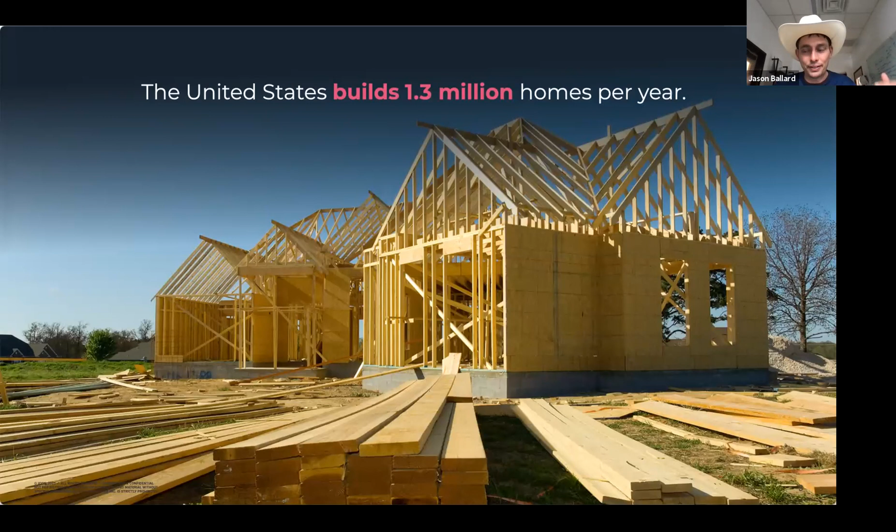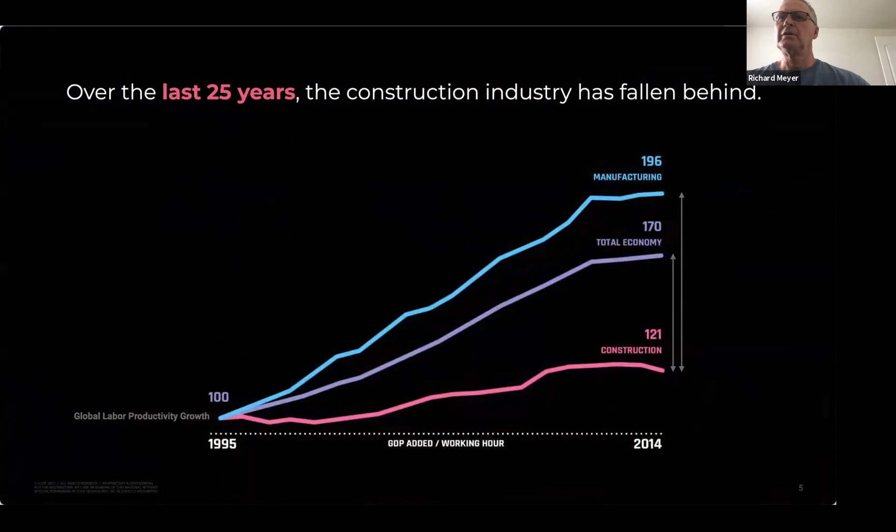So ICON was originally provoked into existence—I say provoked intentionally—by the global housing crisis. In the United States alone, we need about 3.3 million homes per year, and we're only building about 1.3 million. So we're going about 2 million homes into the hole every year, year after year. This is leading to price increases, quality decreases, and all kinds of sustainability and resiliency issues. It's a really big problem because human shelter is a basic need, like Maslow's hierarchy of needs, right there with food and water. The building industry is the number one contributor to almost every environmental issue we can measure. And from a macroeconomic perspective, the entire industry, which is the largest in the world, is going backwards in terms of productivity, which is not what we want at all for an advanced civilization.

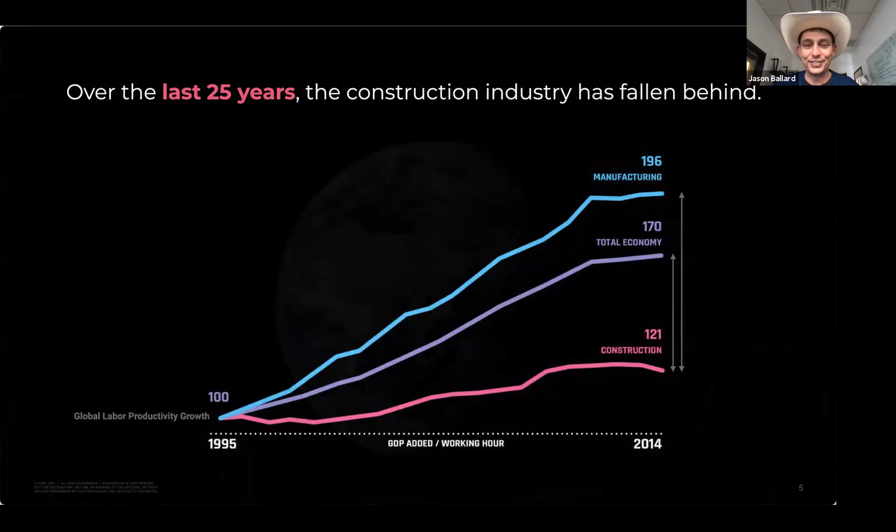If you expand the scope broader, outside of the United States, about 1 in 7 of our sisters and brothers in the world do not live in housing we would consider adequate. Another way to say that is, if it was someone you knew and loved, you would not accept it. So this is a crisis, the global housing crisis—that's what everyone calls it. And it's related to the fact that we've been building houses and structures the same way for about 1,000 years. That is not CEO hyperbole—you could Google a 1,000-year-old home and find that it's made of lumber and bricks or stone and mortar. And that's exactly how we build to this very day.

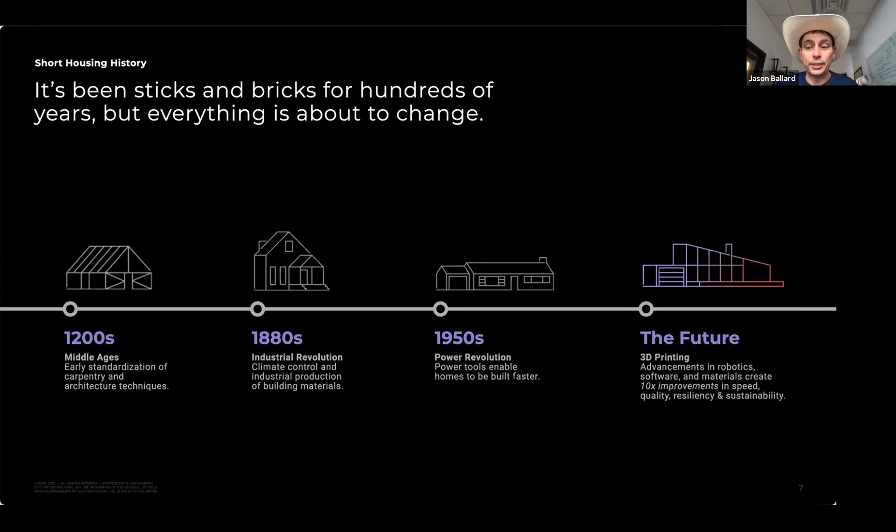And it kind of got us out of the caves and temporary shelters, I suppose. But we've now reached the limits of what this approach to shelter can do. And we believe at Icon that it's time for the construction industry to join the digital robotic age.

We're a construction technologies company. That's exactly what we do. We work very deeply in robotics, in developing our own software to control those robotics and the larger construction process, and in the advanced materials necessary to make all of that happen. So we don't outsource any of that. We have very deep subject matter expertise in all of those areas, with PhD level, multiple PhD level employees.

I think we actually have 12 ex-CEOs that work at Icon. Another way to say that is, I'm not even close to the most impressive person who works at Icon. I'm just the most excited. And so that's why they let me do these presentations.

But the big point about Icon culturally is we really are trying to develop these technologies and use them to serve the world around us. We are a company in service to the world. The primary form of that service has been in housing.

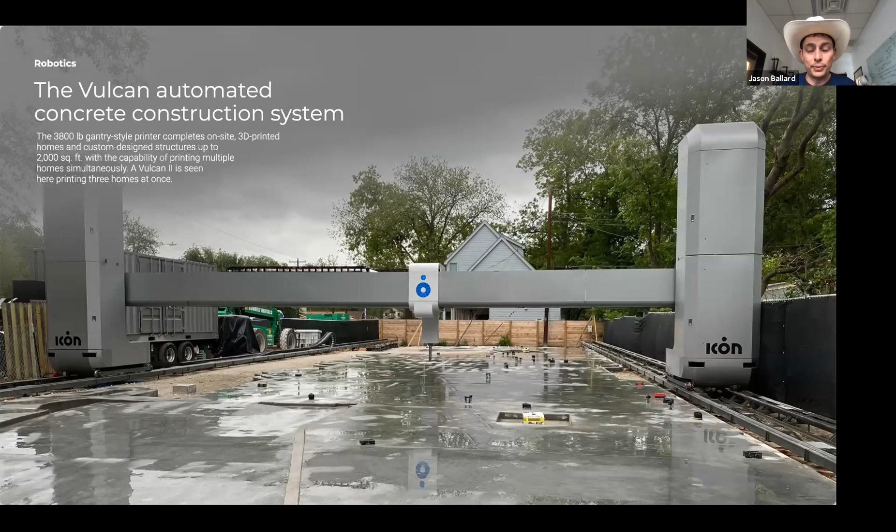Here you can see an example of what it looks like for our Vulcan construction system to be deployed out on a home site. This is a house I'll show you more about in a minute, that we printed in East Austin. We can print houses about 40 feet wide and 12 feet tall. The way that we got to those measurements was working with our development partners. This printer will print over 90% of single-story homes in the world.

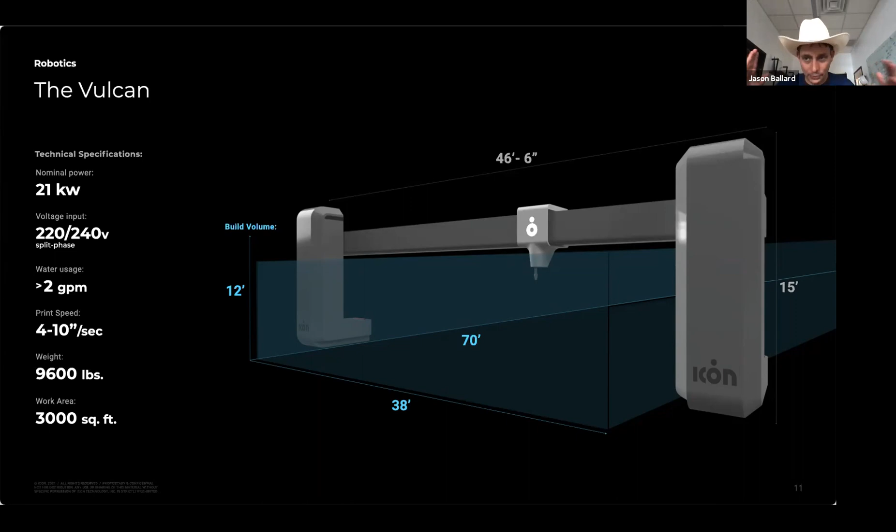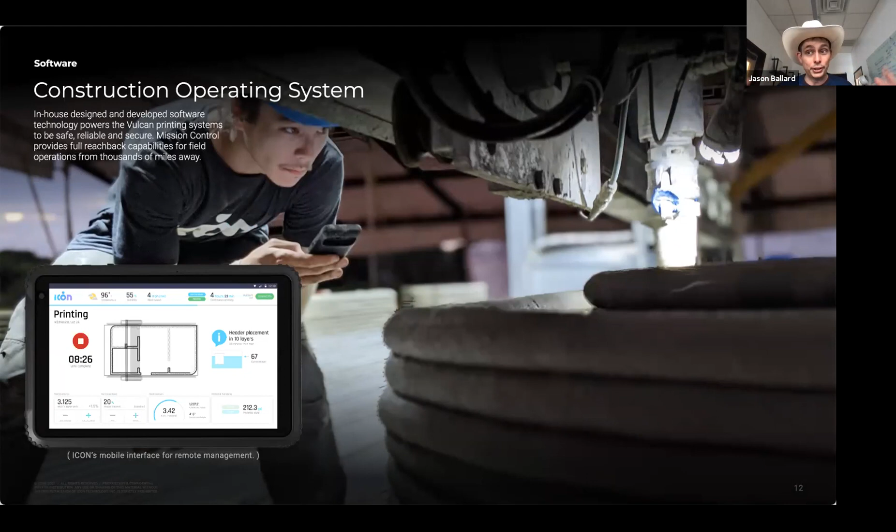So this is sort of where we started, like single-story housing. We've developed our own construction operating system, so all of these robotics are operated with a phone or a tablet. We actually have a mission control where we can remote operate and control the printers from a long way away. This will be very important in our work with NASA in the future.

The material science that we use is inherently more resilient, strong, and high performing than a lot of our conventional building materials. I love wood, I think wood is very lovely, but wood also wants to catch fire. It wants to mold, it wants to be termite food, and it's a conductor of heat. So often you're working against the fundamental properties of wood with regard to what you want a building to actually do. By working with these extrudable masonry materials, you're more naturally cooperating with the behaviors of those materials.

And so the result, why we're so excited about 3D printing from a terrestrial perspective, is that it's faster. We're able right now to print a normal sized American home in about a week. There's some finish out and stuff of course, but that process of delivering the wall system takes a conventional builder 4 to 8 weeks, and we do it in a single week. That alone lowers cost, but of course automating out all those trades and using a single material supply chain also lowers cost. We do all this without compromising customizability.

A lot of the approaches to low-cost housing in the past, whether it was trailer houses, prefab houses, modular houses, or shipping container houses, really reduced design freedom. With a 3D printer, if you printed 100 homes in a row, all 100 can be different. And in fact, if you wanted a house in the shape of a Fibonacci spiral, we could print you a house in the shape of a Fibonacci spiral. It expands rather than contracts design freedom.

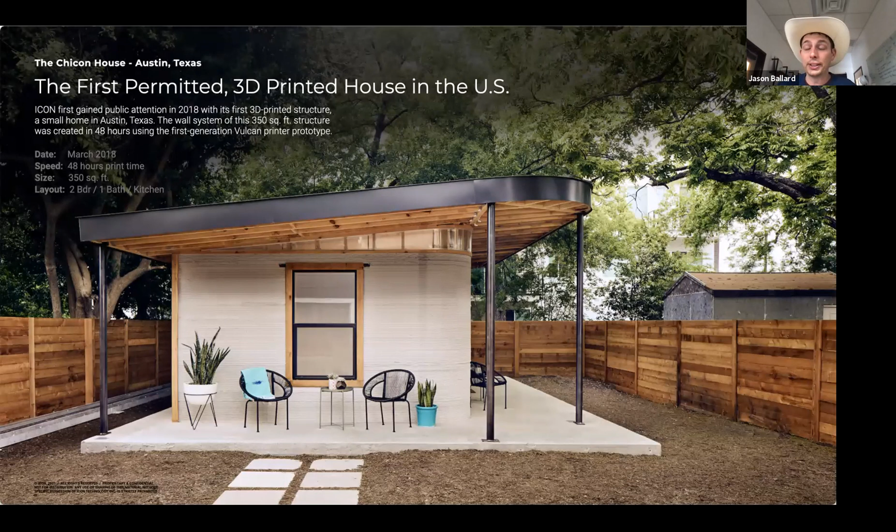We then printed a very similar house about a year later, same floor plan, twice as big, but delivered in half the time. So an overall 4x improvement in construction performance.

We then printed a series of homes for people experiencing chronic homelessness in Austin, Texas. We set up the printer and printed them three at a time, and all three have different floor plans—which is very difficult and expensive to do with conventional building methods. This project is about 2.5 years old now.

The person who lives in this particular house—his other options were a used trailer house or continuing to live under a bridge. These are homes that any of us would be quite happy to live in. My family of six would have a hard time fitting in this particular house, but in terms of their quality, comfort, beauty, and resiliency, it's unbelievable to be able to deliver this quality of construction at this price point.

We delivered the first 3D printed community down in Mexico. This project was notable because it was actually in a seismic zone, and the region received a magnitude 7.1 earthquake that caused extensive regional damage and zero damage to the 3D printed homes. It turned out the safest place to be in Nacajuca, Mexico during that earthquake was in one of our homes—and how seldom that's the story for the very poor, who are usually the last people to receive advanced technologies and building materials. So this was a project we were really, really proud of.

It was actually documented pretty well on a TV show called Home. If any of you have Apple TV, there's a show called Home, and I think the season finale was about this project. So if you want to know more about it, you can look it up there.

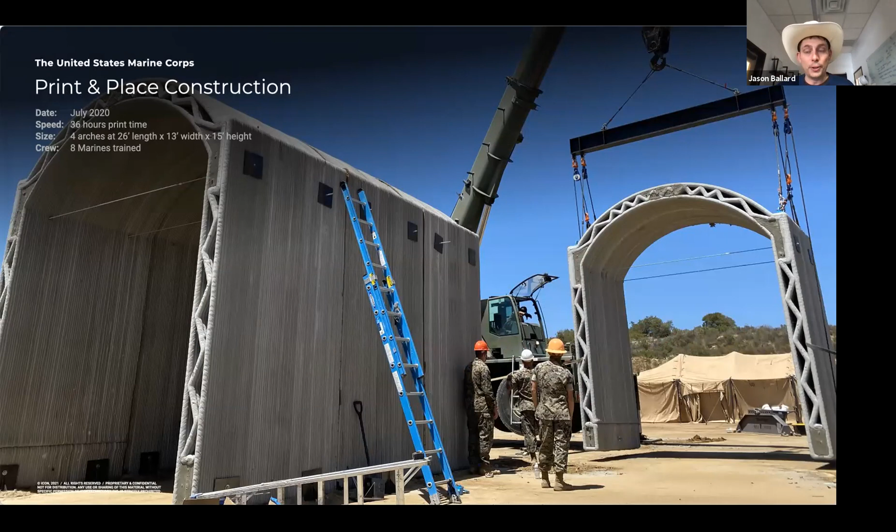We also have a large contract with the Department of Defense and multiple military departments. As you can imagine, they're highly interested in the rapid deployment of resilient infrastructure. Typically, their choices are either fast but unsafe and temporary shelters like tents and prefab boxes, or more resilient permanent bases and buildings that take literally an act of Congress and years to get on the ground.

This particular project, we showed up to a remote part of Camp Pendleton in California, and they didn't tell us what they wanted us to build until after we showed up—that was kind of part of the drill. They said, we want a vehicle hide that a missile launcher can park under to be safe, you have two weeks to build it, go. We printed it in three days, and then the team went swimming in the ocean. So there you are, kind of going inside.

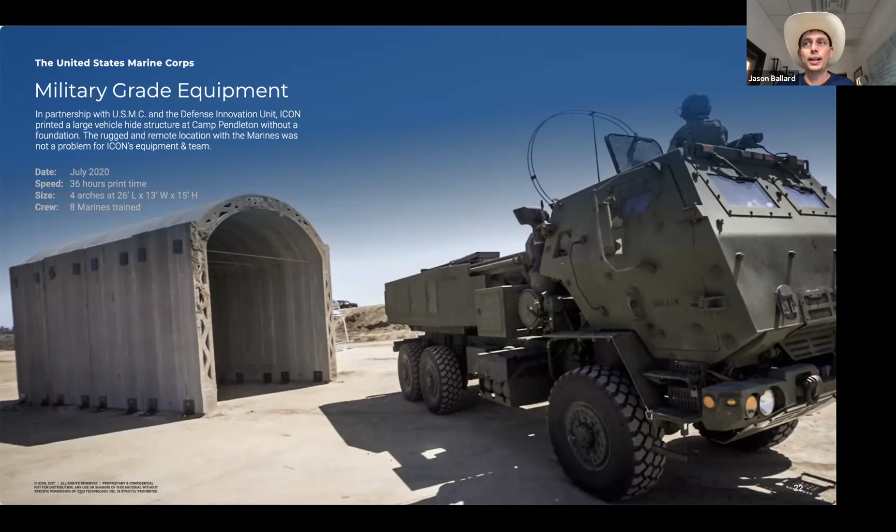So that relationship is progressing really, really nicely. It was through a funding vehicle created by the Air Force, AFWERX, their innovation command, that we first received our first NASA funding—I'll talk about that in a minute. Continuing to work with the military, we're now doing a lot of work replacing aging domestic military infrastructure.

We have lots of barracks all over the United States and other military buildings that are very obsolete, aging and decrepit, and certainly not worthy of the sacrifice that the women and men in uniform are making on behalf of this country.

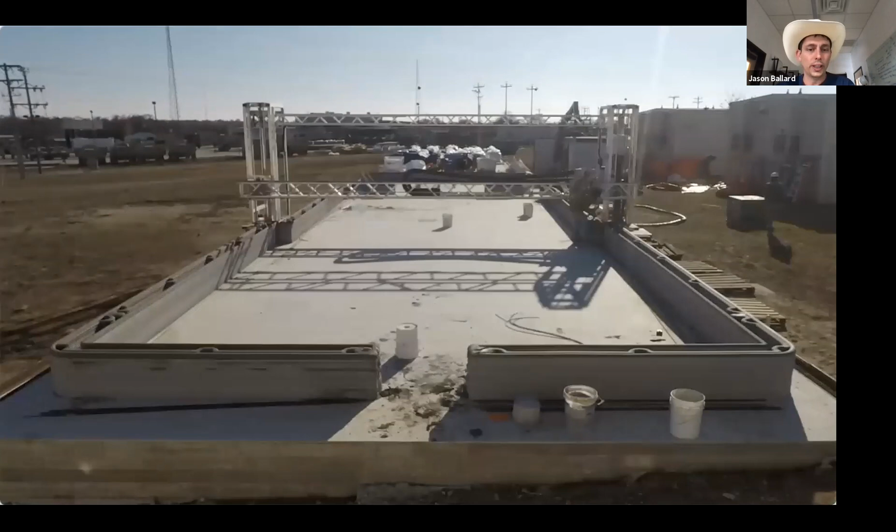So the first barracks that we did in the past year is the largest 3D printed building in the Western Hemisphere, it turns out. But now we're going to be doing a series of these. I won't watch the whole video, but some of you may have been wondering what it looks like when you 3D print, so here's a little bit of a video. It'll show one wing of that barracks going up.

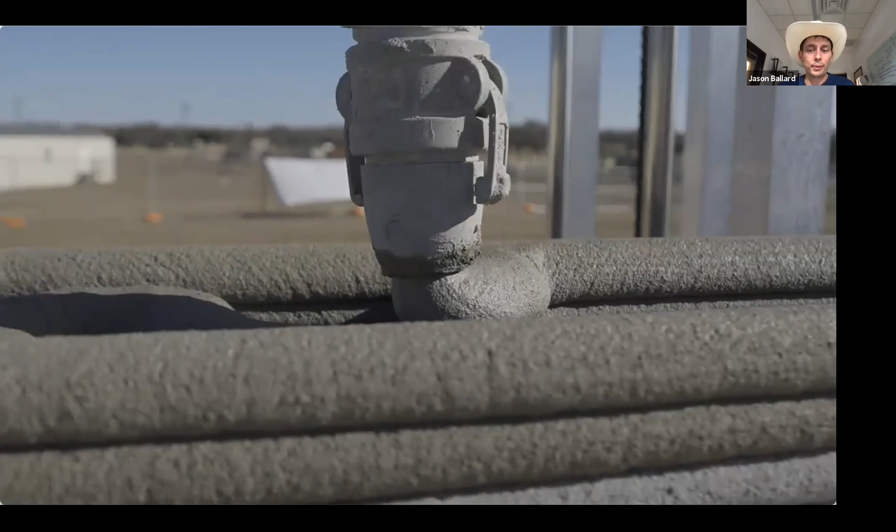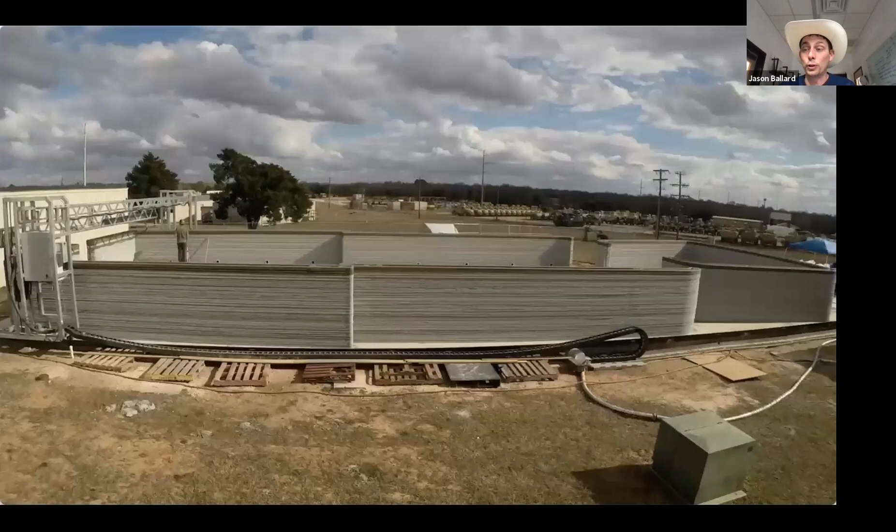It's being printed in this particular video by a printer that's about 2 generations old. You can get a sense of how layer by layer it follows the floor plan. On this project, it was in a bunch of wild weather. Any of y'all remember the snowpocalypse, the big snowstorm that hit Texas last year? When we started this project it was in the 80s, and then that snowpocalypse happened in the middle of it. So our printer has printed as cold as 36 degrees and as warm as 105 down in Mexico. The environmental range is quite large.

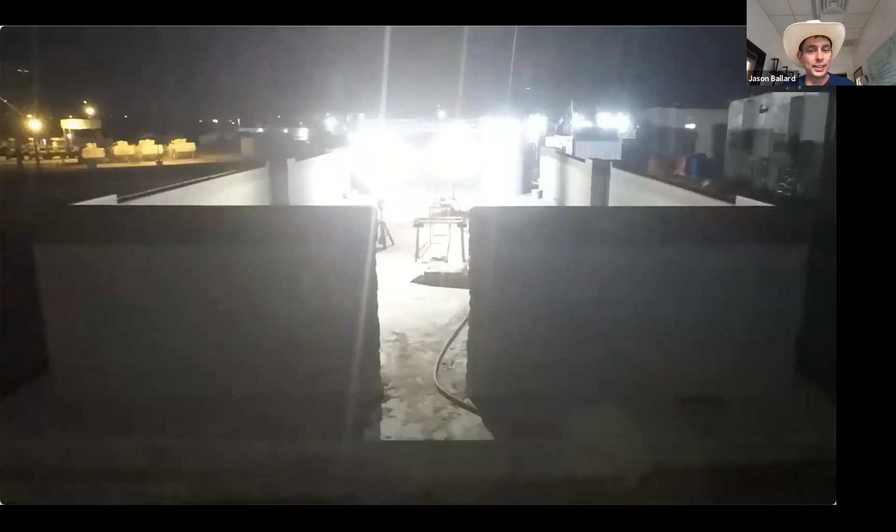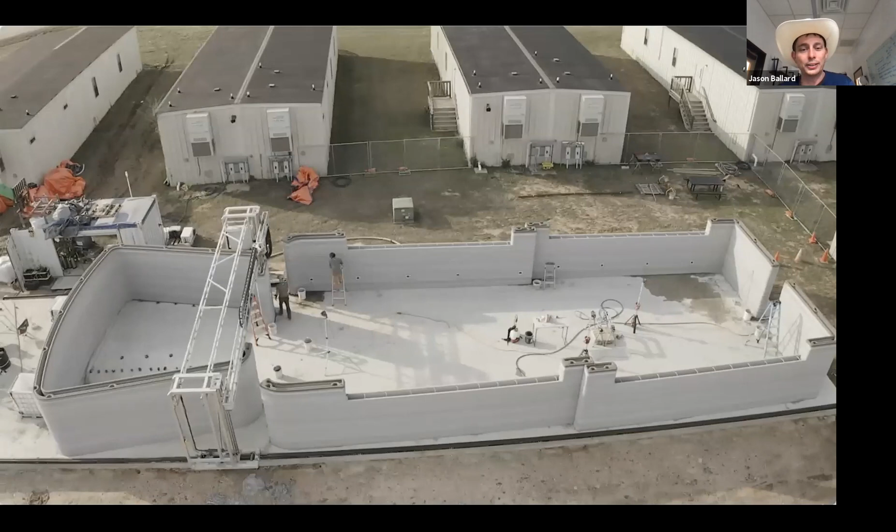You can also notice how few people are in these photos. It's mostly just engineers and staff monitoring what's going on. We're really proud of this project. The DoD—you can see some of the old aging barracks in the background there that we're replacing.

We're very, very pleased. Most recently, the most recent project we finished that was announced was our first market rate housing in the United States, the first 3D printed market rate housing in the US. It was an infill development in East Austin. These homes were sold at market rate, and people can get mortgages for 3D printed houses. This represents a load of progress from us, and the quality of the prints. This was just a really big moment for us, and we're super proud of it.

Almost through with the Earth stuff, so we can get to the fun space stuff. We're in the process of finishing up a house we call House Zero, and this is a house we're using to really advance architectural possibilities. For a long time, the customers who have hired us have ended up asking us to print houses that look a lot like the houses they're used to. We've always thought this was a shame, because 3D printing opens up all these fantastic new possibilities for shapes and architecture, since a curved organic form is the same price and difficulty as a straight line.

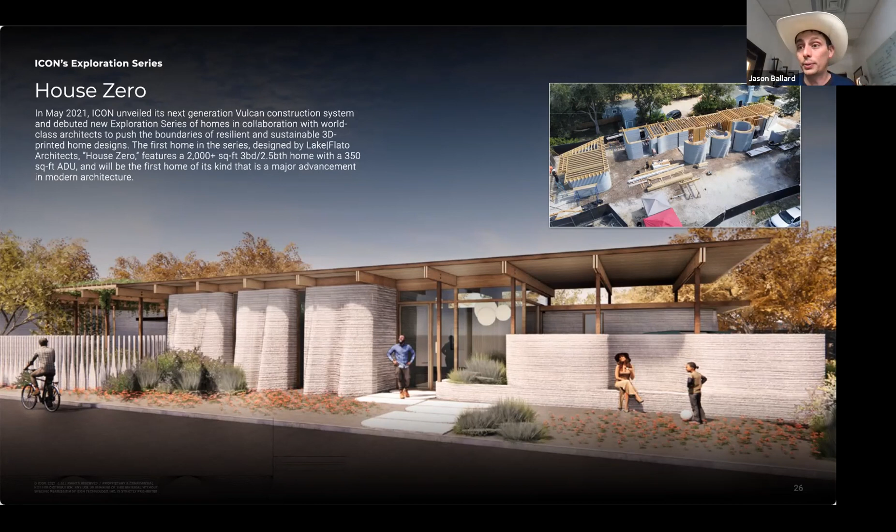So you can see we've really incorporated organic forms. These look like very premium high-end finishes and approaches to building, but they're very straightforward and simple for the printer. In fact, those ripples in the wall actually make those walls stronger—much like if you had a flat piece of paper it would fall over, but if you fold it, the paper will stand up. We can use the shapes of the walls to make them stronger and more beautiful at the same time. Very, very cool stuff.

Most recently, you may have seen in the news in the last week, we just announced that we're about to do a 100 home community in the Austin, Texas area, where we're going to deploy a fleet of printers. We're doing this in partnership with Lennar, the largest home builder in America, and we're very excited about this project. But as I said, we're trying to put this technology in service to humanity, and part of that is solving big problems, but another thing is opening up profound opportunities.

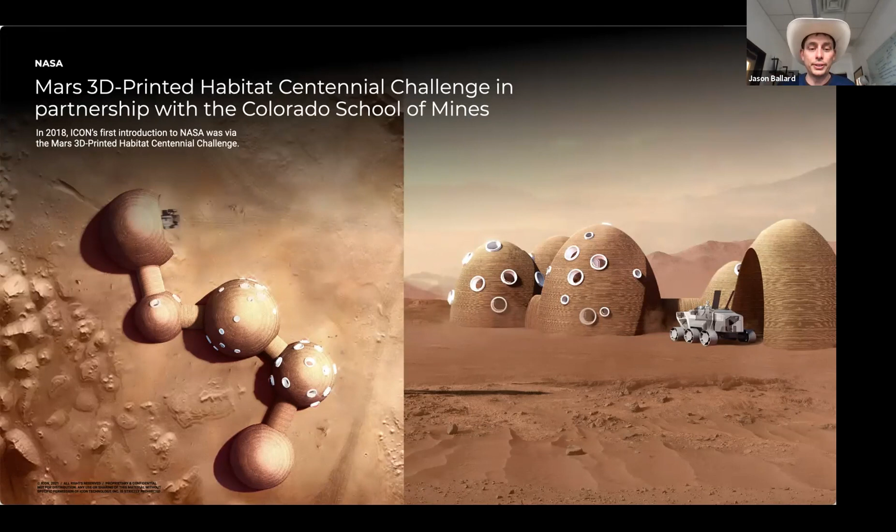So we have been working with NASA since the very year this company was founded. That year, NASA had a Mars 3D printed habitat centennial challenge going on. We partnered with the school where I'm doing my graduate studies, the Colorado School of Mines, and we participated in that contest, and we were an award winner and a finalist. That opened the door for us to begin developing this technology for space much more aggressively. More recently, the conclusion of that Mars journey was at the Johnson Space Center in Houston, and I know Stokes is familiar with this, and maybe some of you are as well.

They wanted to build a Mars analog habitat that really resembled the kind of permanent infrastructure we might deliver on Mars, and they believe it'll have to be delivered with robots using local materials. So they commissioned us to design and deliver a Mars analog habitat that they're going to use to study long-term human health and performance, while astronaut analogs live there for a year at a time, with an 8-minute communication delay, the whole 9 yards, to begin researching the effects on human beings for long duration space exploration.

This is very cool for us. I mean, it's like we really can build an off-world construction project using off-Earth analog materials, and we can do it robotically. So we're very, very proud of this project. I hope you all get to see it.

Being inside of it has the feeling of an advanced but extinct civilization that left a temple here. It's very cool to be inside. We're done with the print now, so we're doing all the mill work and finishing out the thing soon.

They're going to start missions in it next year. It's also very cool as a space nerd that a lot of the pictures of human beings getting ready to go to Mars will take place inside an iconic building. For a skinny kid from East Texas, it's definitely a pinch-me moment. And it was cool to be able to do it in Houston, which is very near where I grew up. So very cool.

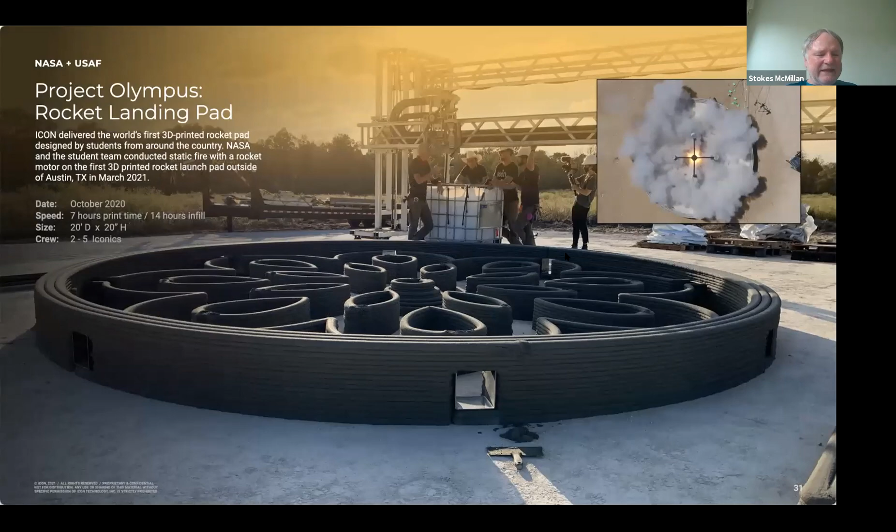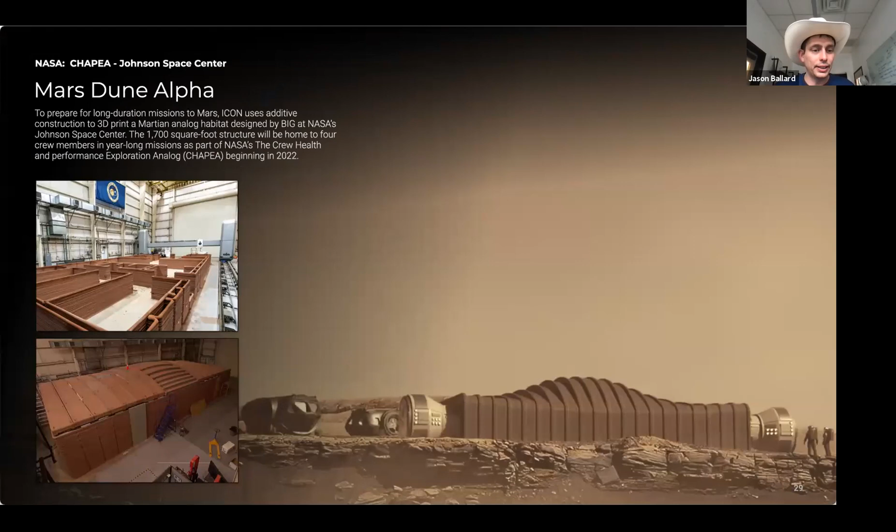Okay, we got it. The most long-term of our engagements with NASA is something we call Project Olympus. And that is our attempt not to use our Earth-based printer, which you saw on this one. If you see the left inset printer there, we're using our normal Earth-based printer.

But our most long-term engagement is on Project Olympus. This is the desire to dedicate effort to developing a purpose-designed off-world construction system. It has to fit in the payload of a rocket, it has to conform to certain mass and power requirements, and it has to use the local materials of the moon and ultimately Mars to do its work. So this is the project that we call Project Olympus.

We're contracted with the Marshall Space Flight Center to do this work. The NASA Center for Advanced Manufacturing and Construction is at Marshall, and they're taking the lead on these off-world construction technology developments.

As part of that program, we've already demonstrated a 3D printed rocket pad. They believe rocket pads will be some of the most important early pieces of infrastructure needed if we're going to go to the moon to stay. If you return over and over to the same spot, you're going to blast a crater in the surface of the moon. Not only that, the mass of modern landers requires so much thrust during landing that the ejecta from the lunar regolith can actually reach orbital velocities. It could really make a big mess if we can't contain the dust and the effects of repeated landings in the same spot.

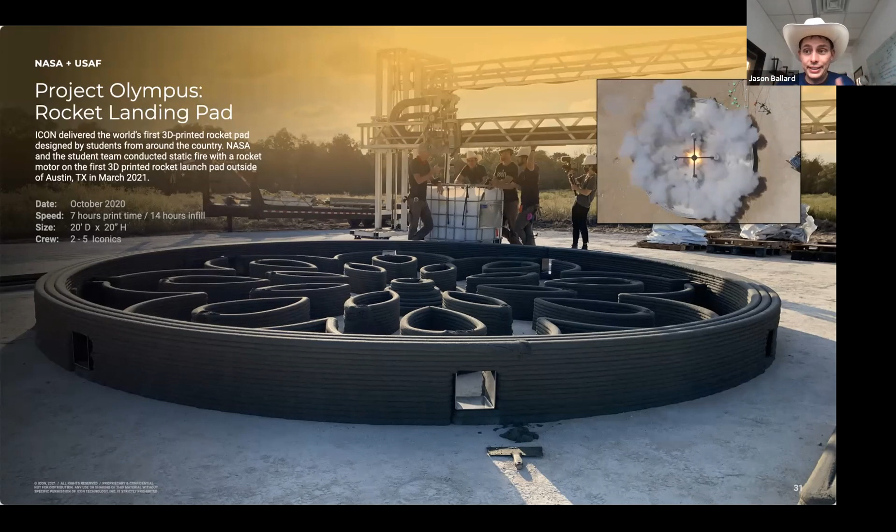So we created this 3D printed rocket pad with a cool internal structure meant to defray the exhaust and ejecta. We actually strapped an M-class rocket motor to it to see how it would fail. I hate to spoil the ending, but the rocket pad did not fail. We had a lot of sensors and were able to grab a lot of data, and I believe there'll be a scientific paper coming out about these results in the not too distant future.

But we've now at least confirmed in an Earth analog environment that we can 3D print a rocket pad, a landing and launch pad, that could withstand the kind of thrust you would expect of a lunar lander and launch vehicle.

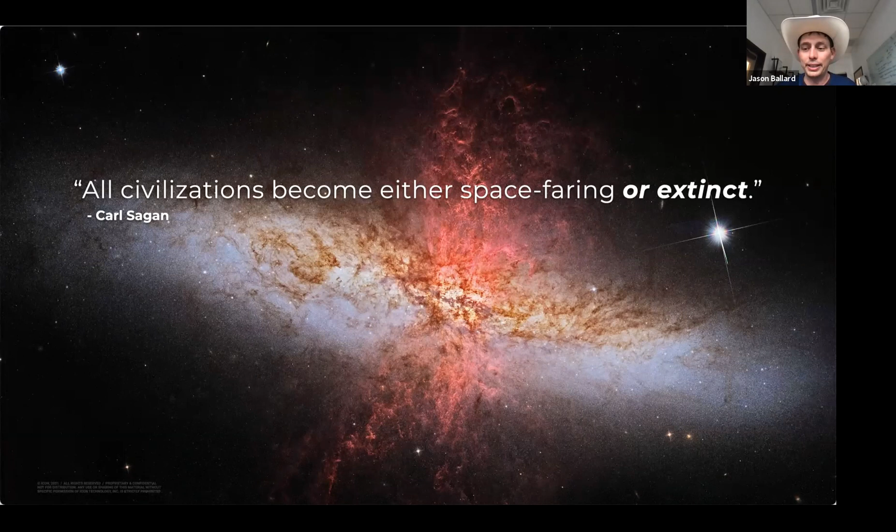So that was very cool for us. And all of this makes us feel like there really is something for us to do here, and not only that it's cool to do, but it's important to do. I truly am part of that camp of people that believe becoming a spacefaring civilization is the most pro-human, optimistic, pro-future thing that you can do. It's a thing that we need to do, not a nice to have, but it is a long endeavor.

So we're going back to the moon to stay, as part of the Artemis program. That's the program now, and so that's what we're building for. But we feel this great responsibility, because what we're talking about is humanity's first, not our first camping trip, but our first true home on another world. And I kind of can't believe I get to work on this. It's really not only scientifically and engineering-wise interesting, it's a very romantic idea. It's like the coolest project you could ever hope to work on.

It's a big trick, right? The moon is not slightly different. The moon is a lot different. In fact, there's a lot of ways in which Mars would be easier. Mars has an atmosphere. Mars has more gravity.

On the moon, we're dealing with micrometeorites that rain down at about 180 per square kilometer every year. They have no atmosphere to burn up in. They all come down, and they're at ballistic velocities.

The lunar dust, I don't know how familiar you all are with it. It's brutal. The Apollo astronauts said it was the worst and hardest challenge of the entire Apollo program, was managing the lunar dust. 100% of seals during the Apollo program failed. Everything from the seals on the astronaut gloves to the seals on the doors. These were seals that had been tested for thousands of hours on Earth, and they failed after 13 or 14 uses on the moon because of the dust and its abrasiveness. There's no weathering on the moon surface, so it's like micro razor blades. And on top of that, the dust can get electrostatically charged and levitate and float. The moon dust is crazy.

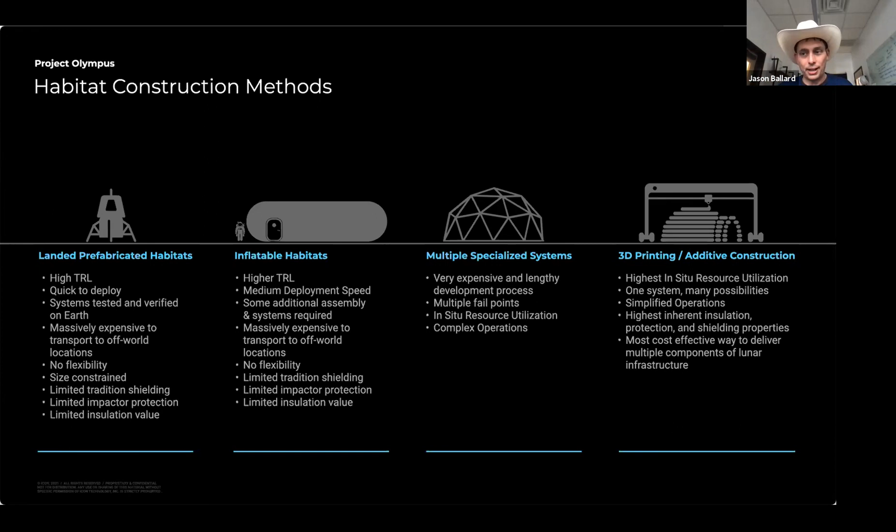I don't think this is just a neat thing to have. I think we have to have it if we're going to become a spacefaring civilization. We have to be doing robotic construction using local materials, full stop. I don't think there's another way to do it in the long term.

To give you a sense of what I mean by these costs, we ran the numbers.

I think we got another hot mic. Who's that? What's his name? I don't know what it is. Hey, we got a hot mic. Dave Hansen, please mute your mic. Oh, sorry about that. No worries.

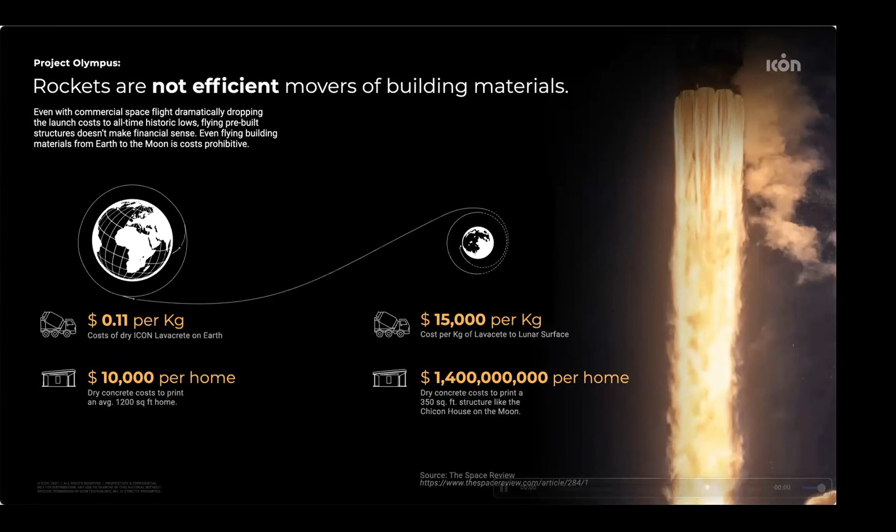We actually ran the numbers on if we'd taken the dry material of that first little tiny house we built up to the lunar surface, how much would it cost just in rocket fuel to deliver it, not build anything. The result is about $1.4 billion to deliver materials sufficient for a 350 square foot structure to the surface of the moon. I know real estate in San Francisco is expensive, but this puts it to shame. We're never going to have a moon base this way if it costs $1.4 billion every time we want to build a tiny house.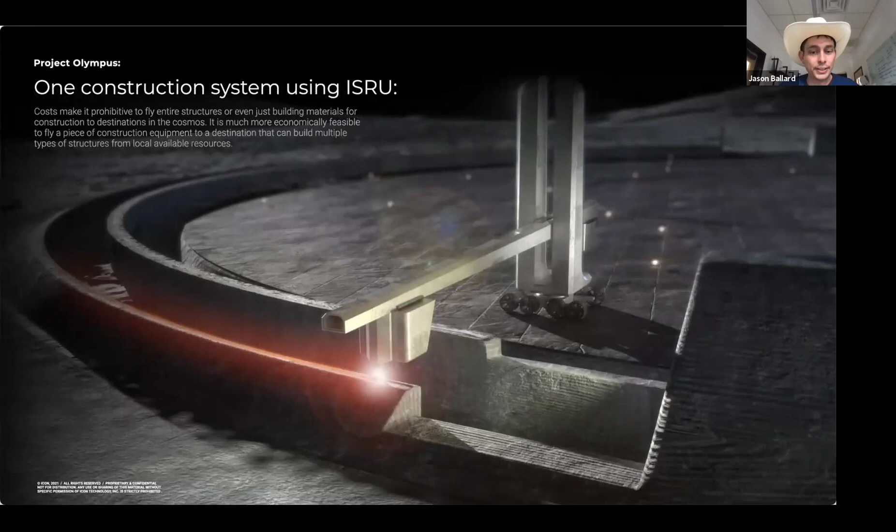The phasing from here for us is we're scheduled presently to go to the moon in late 2026 to demonstrate the core subsystems, and I'll show you some of those subsystems soon. That will open up full-scale demonstration in phase 2, and then hopefully the moon base gets underway in a very permanent way. The rendering in the background is a moon base design we spent a lot of time on, situated on the edge of a permanently shadowed region of the moon where we believe there's water and other volatiles present.

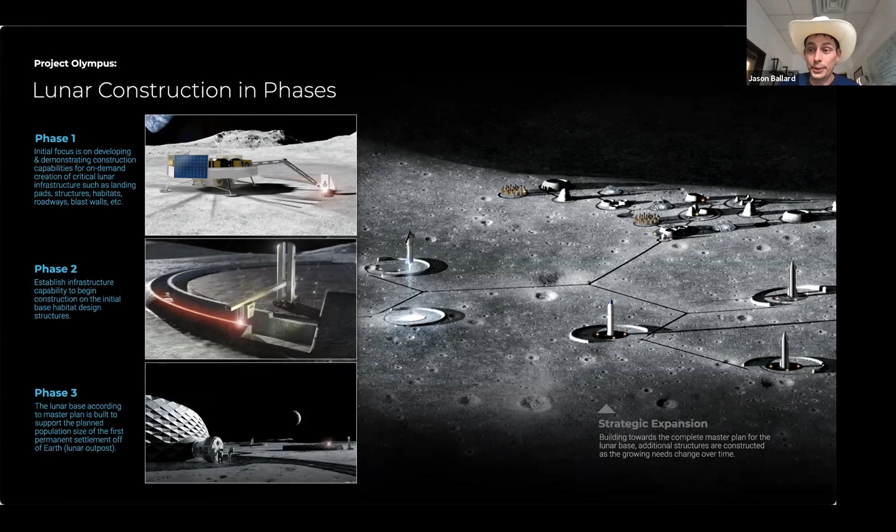So that's probably where you'd want to situate a moon base. We've used a Steiner tree architecture for the road layout to minimize the amount of material needed to build those roads. Everything you see in that picture in the background is buildable within the dimensions of the Olympus system. This is as close to real as it gets. We've run all the thermal calculations on those buildings, we've run the stress calculations on those buildings. I'm not saying this is what NASA will build, I'm saying what you see could be built. Nothing in that picture is science fiction.

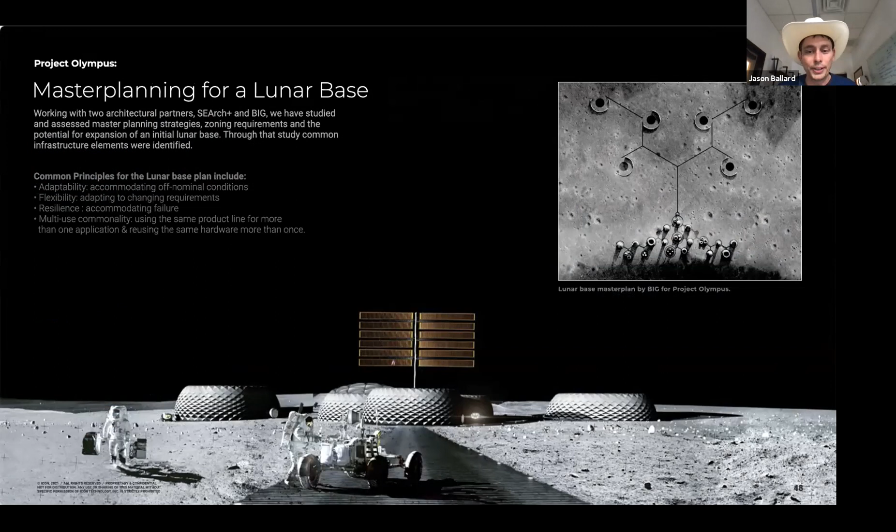And so we're excited about what all that could mean. I want to talk a little bit more about the actual processes we're using to take raw lunar regolith, the local soil, and turn it into a building material. That's most of our work right now.

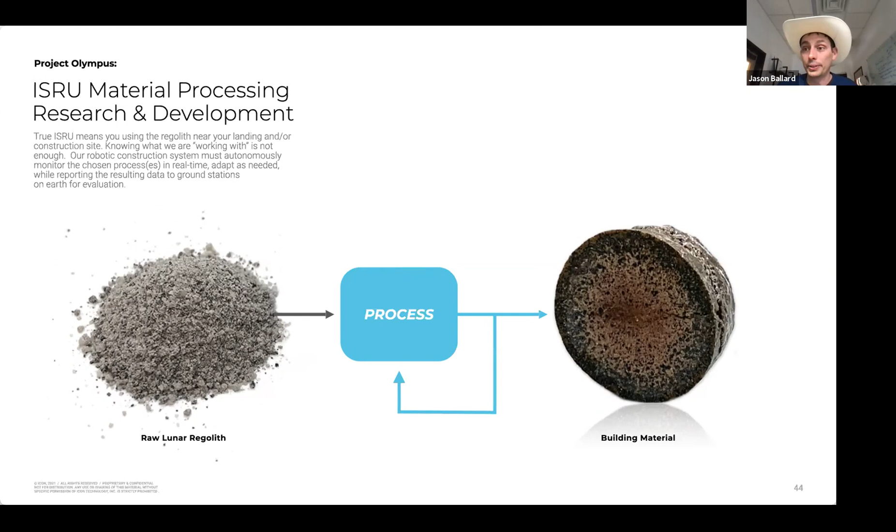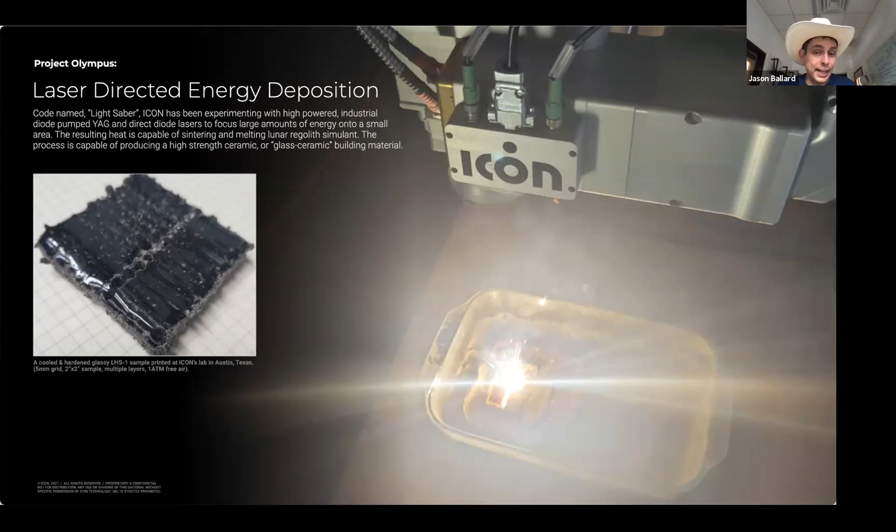Our two favorites—I'll start with my favorite—is laser directed energy deposition, where you use a laser to melt the lunar soil and turn it directly into a building material. That's the laser we've developed in-house. We're now putting it through dirty vacuum chamber testing, and we've been loving the results.

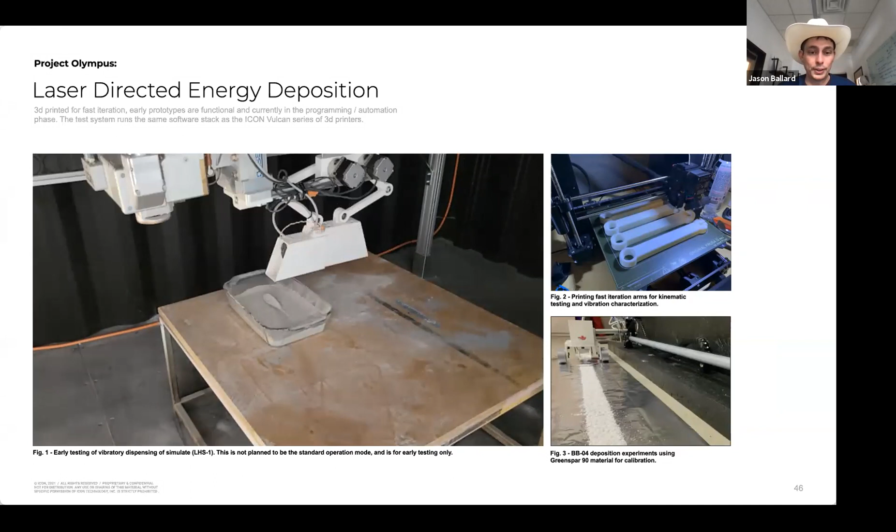This is a benchtop test. You can see where you'd deposit the regolith and then sinter or melt it into place, and the result is a building structure. We've been doing this at a small scale, as you see there, and we've slowly been turning the scale up, up, up, and up.

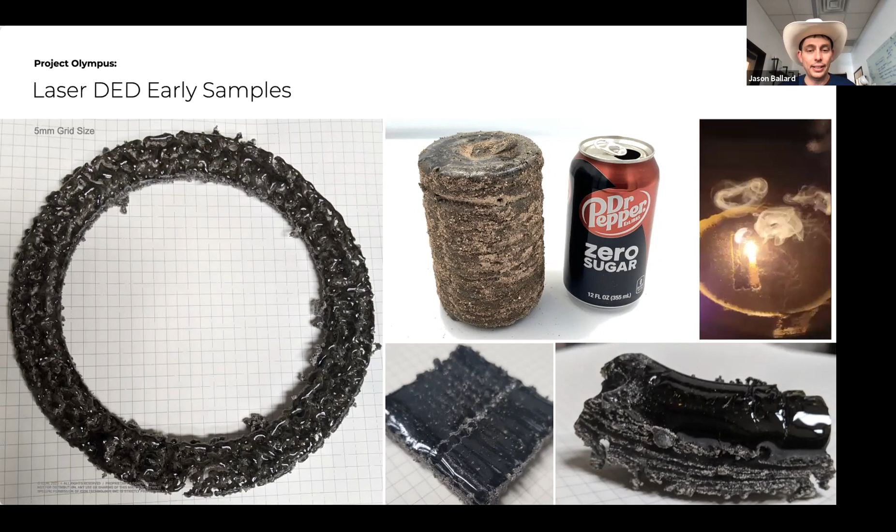We're very pleased with the results, both in terms of strength and power requirements. That little ring you see on the left, we produced with 80 watts of energy in a laser. So we can do these with the kinds of powers we'll expect to have, and I'm very optimistic.

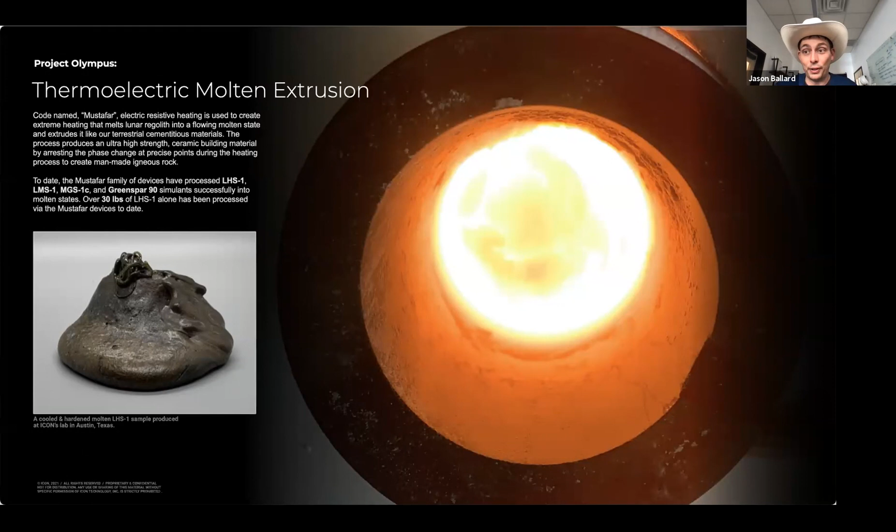The other big area of research for us is straight-up melting the lunar regolith. If all else fails, almost every material in the universe will melt. So are there highly efficient furnaces, for lack of a better word, that we could use to melt the lunar regolith and extrude it, almost like melting plastic in desktop 3D printers. This research isn't quite as advanced as the laser research, but we're liking the early results.

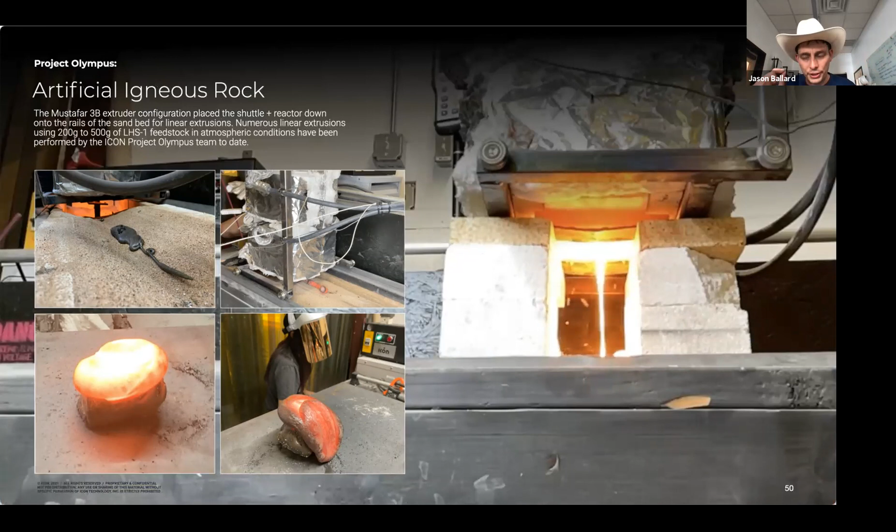It'd be nice if we had two different choices for different applications. The laser is much more precise, and the melting might be more useful for bulk building projects like walls or blast shields, where precision wasn't as important as just delivering bulk material into a built object.

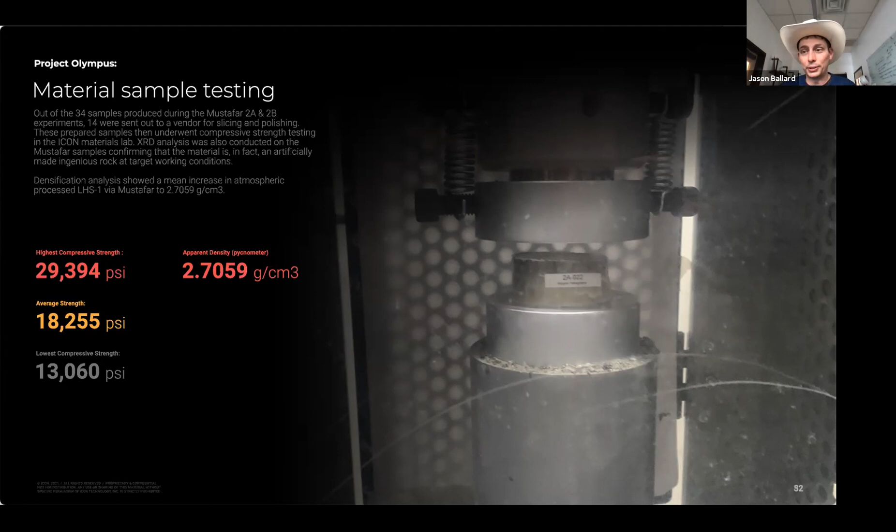We've been quantifying all our samples, and they are incredible—both with the laser and with outright melting, we're getting incredibly strong samples. As high as almost 30,000 PSI, averaging close to 20,000 PSI. The weakest we've tested was about 13,000 PSI. To put that in perspective, the concrete the Air Force requires for a runway to land a military jet is 4,000 PSI. So we're talking unbelievably strong masonry ceramic material.

All signs point to this being a very promising direction. There you see a rendering of the test we're scheduled to do in 2026, where we will put the laser subsystem and possibly the melting subsystem on a CLPS lander and demonstrate built construction specimens on the lunar surface, then hopefully take that subsystem all the way up to TRL 9, which will unlock development of the full system.

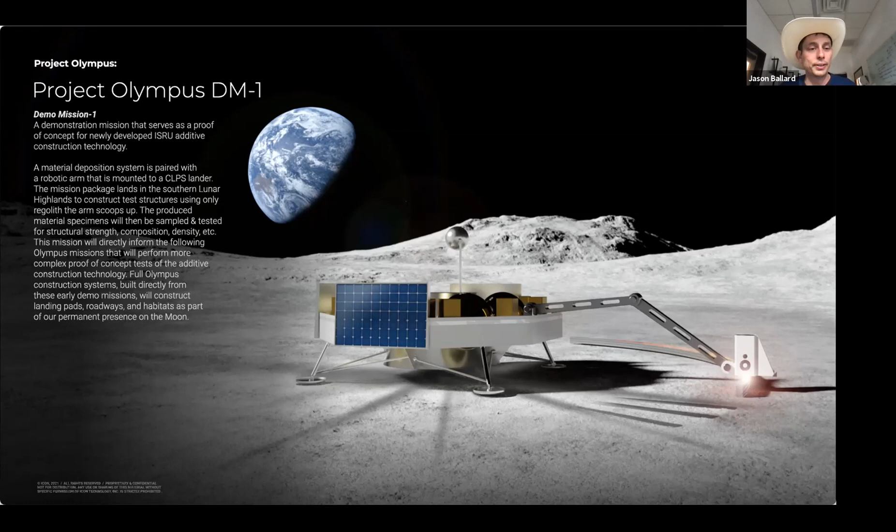So that's what we're up to. We've got a ton of amazing partners—not just NASA, but the Air Force, the Department of Defense, the Marines—a bunch of really wonderful investors who have been incredibly supportive, and some of the best architects and builders in the world.

You won't meet a more optimistic person than me that we can have a moon base if we want one. We can afford a moon base if we want one. And I hope that's exactly what happens. So that's the end of my formal presentation. I'm happy to take questions and see what's on your mind and where we go from here.

So my question is, what about insulation for domestic houses? How thermally insulating is your material, or do you have to put insulation between layers?

Yeah, so a few things to say. The bulk regolith has very high thermal mass, so we're of course going to need some life support systems in here, akin to what you'd have on the International Space Station. The question is, how powerful do those systems need to be? Our calculations show that at about 2 meters thick of wall, which is quite thick, we can do all of the radiation shielding, micrometeorite protection, and thermal insulation we need, sufficient to keep the habitat stable and livable with current life support systems. So we need about 2 meters thick of it.

Yeah, we've got plenty of time, Jason. I think we're all... oh, amazing. Can you see my screen once again? We kind of played this game once already. Yep, we see it. Okay, I'm going to try to enter full screen and see if that works.

I won't show you all, this is a very long presentation, but just to show you the kind of work that we've been doing. We did study all of the major lunar missions, every landing site, both robotic and human.

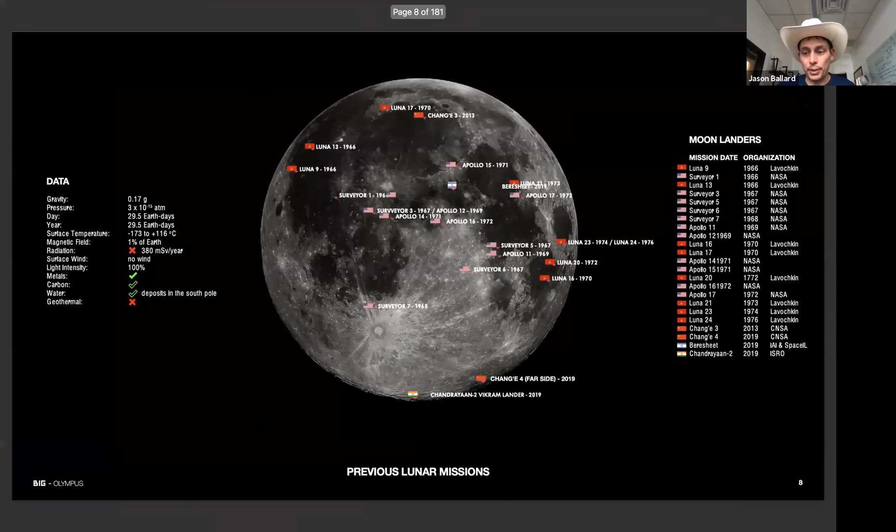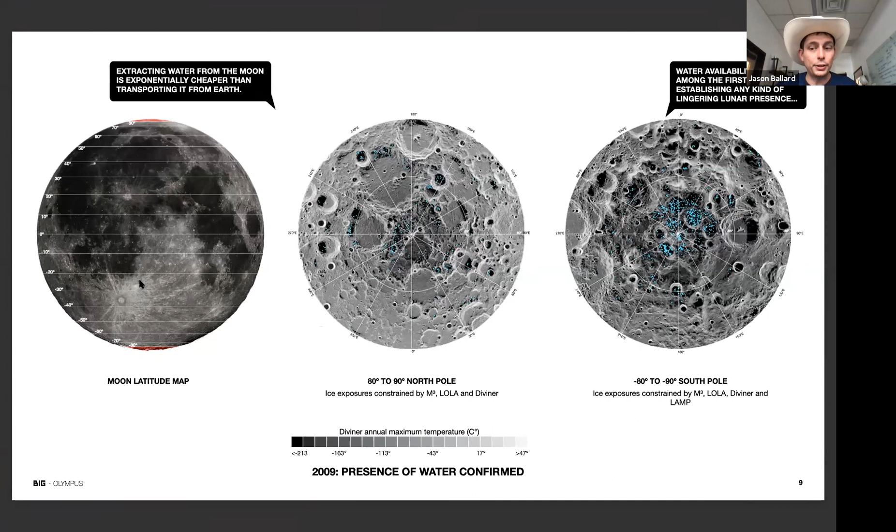We've looked very closely at where the water's confirmed, and what we know about the geology in those areas, because in the Mare regions it's very basaltic, and the polar regions tend to be very feldspar rich. So those materials would behave very differently.

So we thought a lot about everything we could find out about what the site might look like. NASA hasn't announced where the location of a moon base might actually be. We've studied a lot of other architectures, Earth-based, of extreme environments, like how humans have learned to live in other extreme environments on Earth.

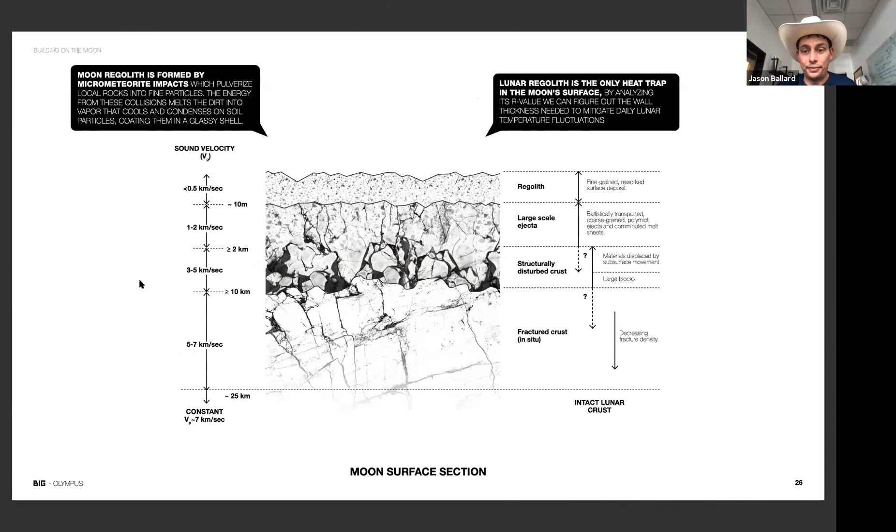We've really tried to understand, will we be able to harvest the regolith we need at a fine enough particulate to process it properly? Again, we're standing on y'all's shoulders. There's so much wonderful engineering and geological research that has been done.

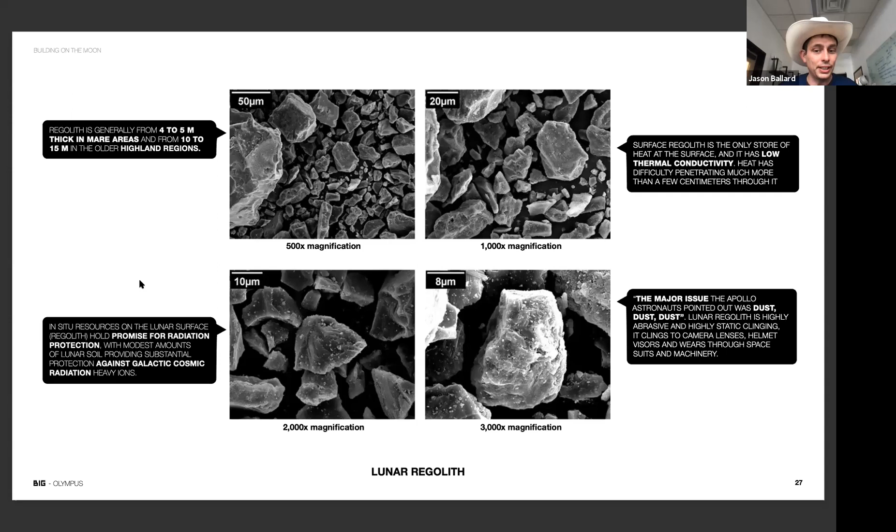This is some of the moon dust stuff I was telling you all about. It's really aggressive, nasty stuff. I showed you laser and extrudable melting today. We've also looked at microwaves and other approaches.

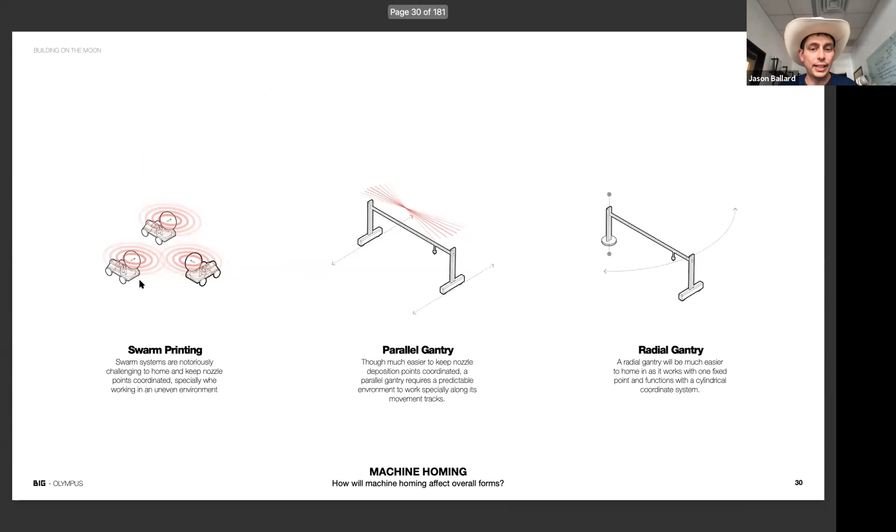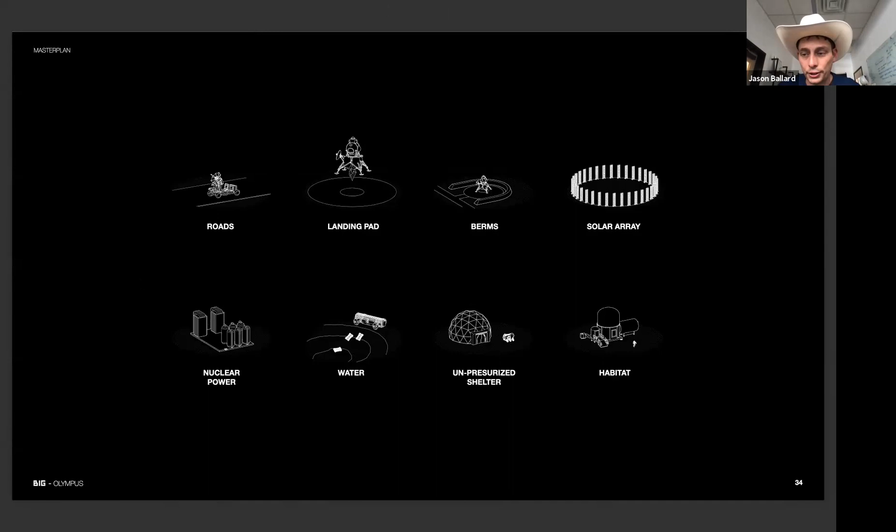We looked at a bunch of form factors for the actual printers. We looked at a number of geometries for lunar architecture. We've thought about all the major infrastructure elements that will be necessary to have a moon base: roads, landing pads, berms, and blast shields, to make sure we were designing a sufficient system.

We thought about how those things might be built, in what order, and how they might be arranged. This is that Steiner tree thing I was explaining earlier: if you lay everything out in a square you need one amount of roads, but if you lay it out in this Steiner tree orientation, you can reduce by about 15% the amount of stuff you have to build just by optimizing. This comes from circle packing mathematics.

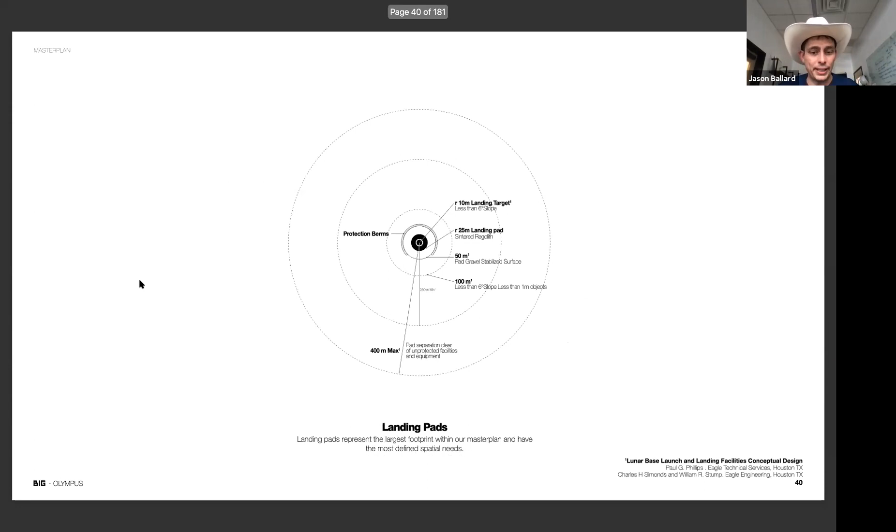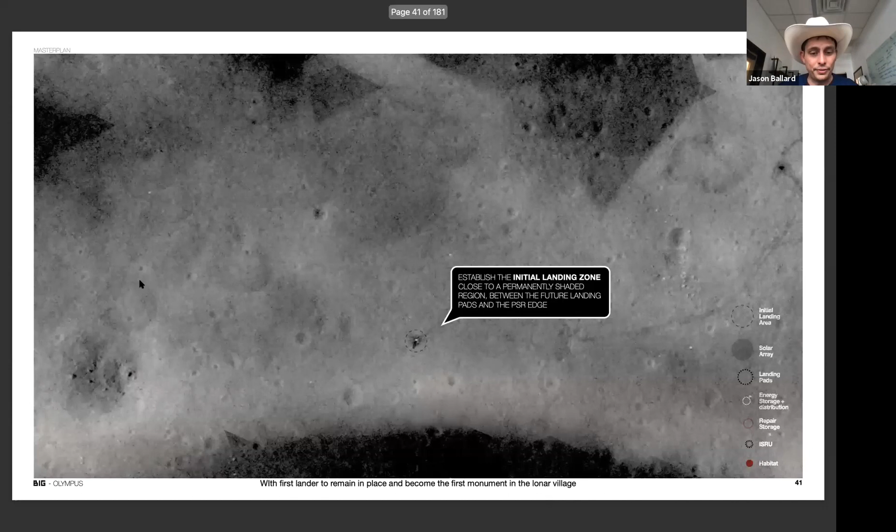We've thought about the size the landing pads need to be based on everything we know about the thrust of the approved landers. We've thought about phasing, where you would initially have a lander, then put some repeatable roadways around that lander so you weren't always handling the lunar dust. You'd want to very quickly move to landing pads that could connect to the original habitat.

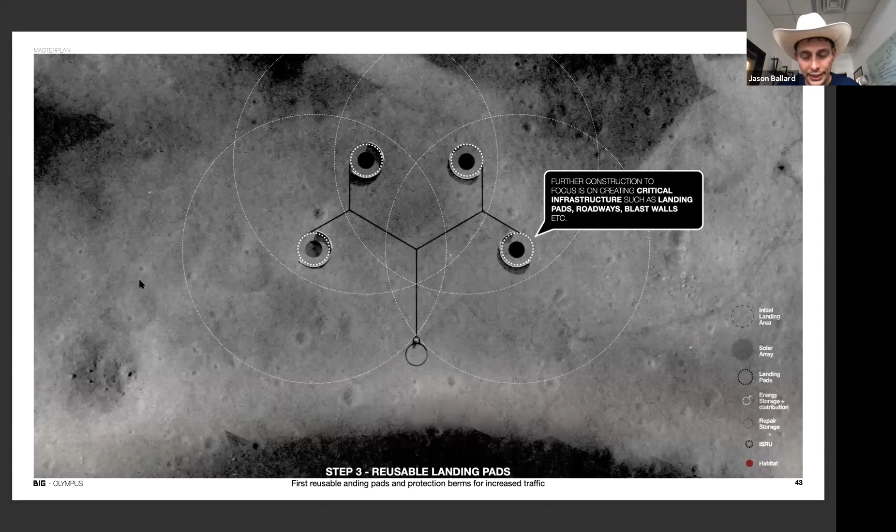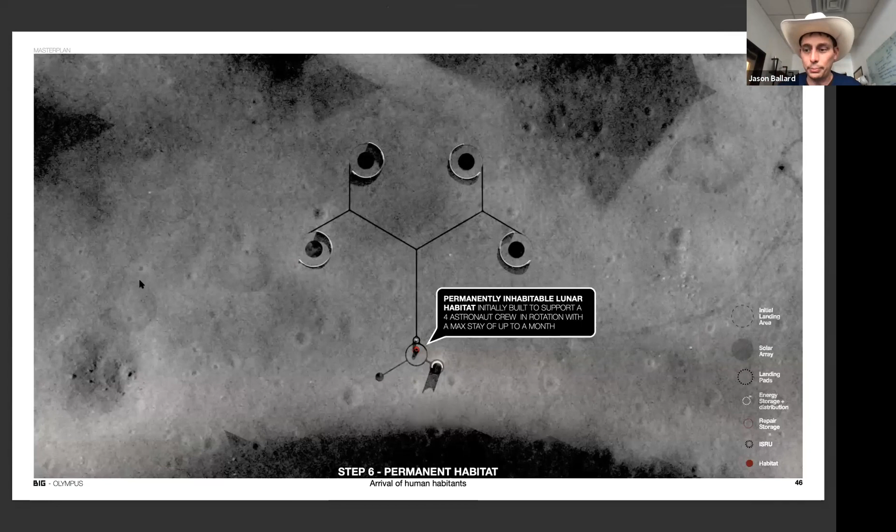So all this has just been flown up so far. But then eventually you want your ISRU infrastructure, and then you have your first building that you build on the moon. Then you can begin expanding the clusters of habitats, and ultimately end up with this little, almost like in Antarctica, lunar hamlet on the edge of this permanently dark area. I think it's a really cool thing to imagine.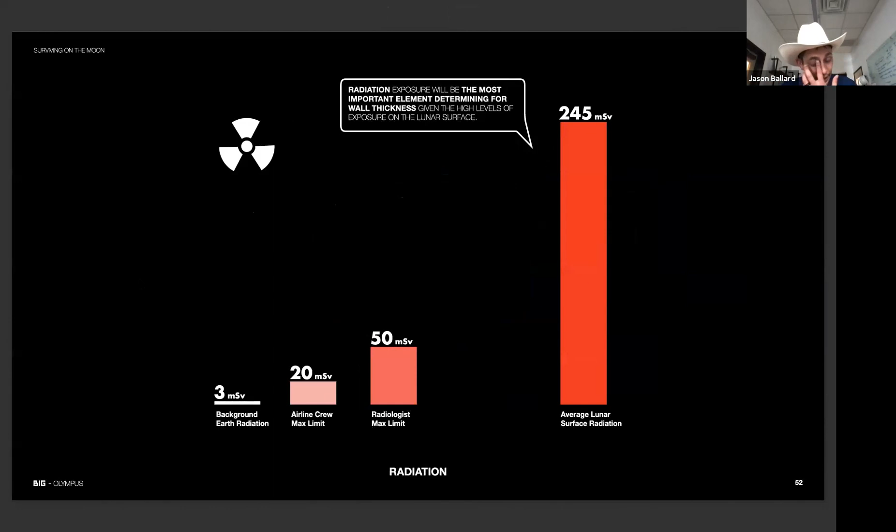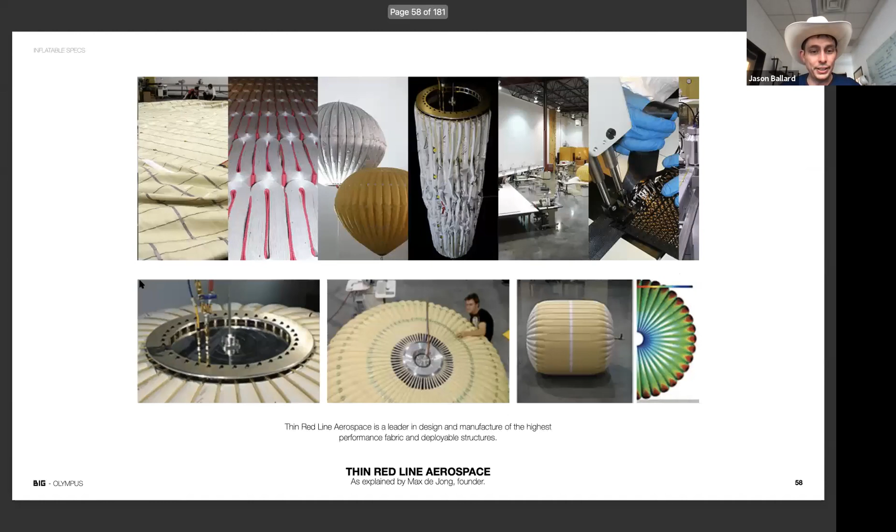Again, we've really looked deeply at the radiation doses, what amount of shielding we'd need, how we compare to inflatable and hybrid structures, what the ideal shape would be. We've studied other inflatable structures to make sure we were as good or better. We've thought deeply about the shielding and pressure requirements, because all the pressure is going the opposite way - it's basically a big pressure vessel.

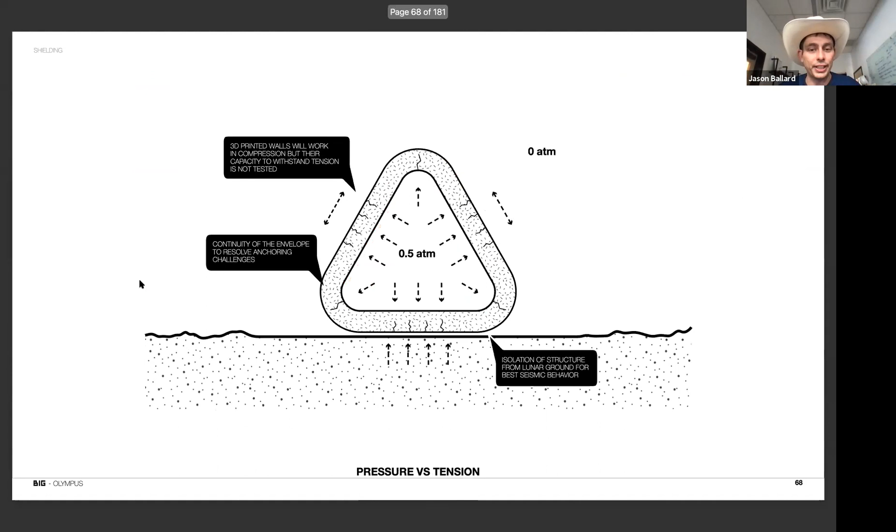The strongest thing is a circle, but we can't print circles. So what's the optimal angle to print? How thick does everything need to be ultimately to protect from everything we can imagine? It ends up being about 2 meters.

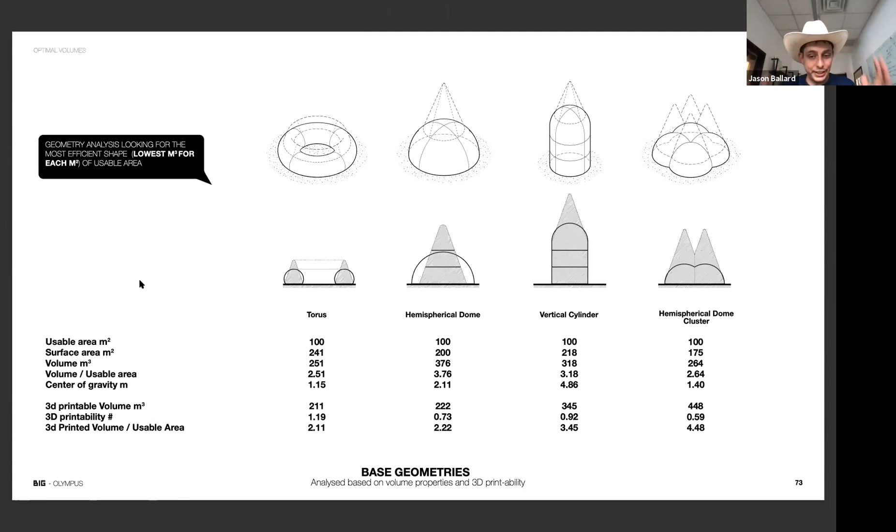We've then said, what are the most optimal volumes? Is it a torus, is it a dome, or is it vertical cylinders? We've analyzed these things in terms of both usable area for humans and the amount of energy and material needed to create those structures. We then submitted those structures to various kinds of testing to understand how they would perform under stress. We studied every kind of analog, whether it was the International Space Station.

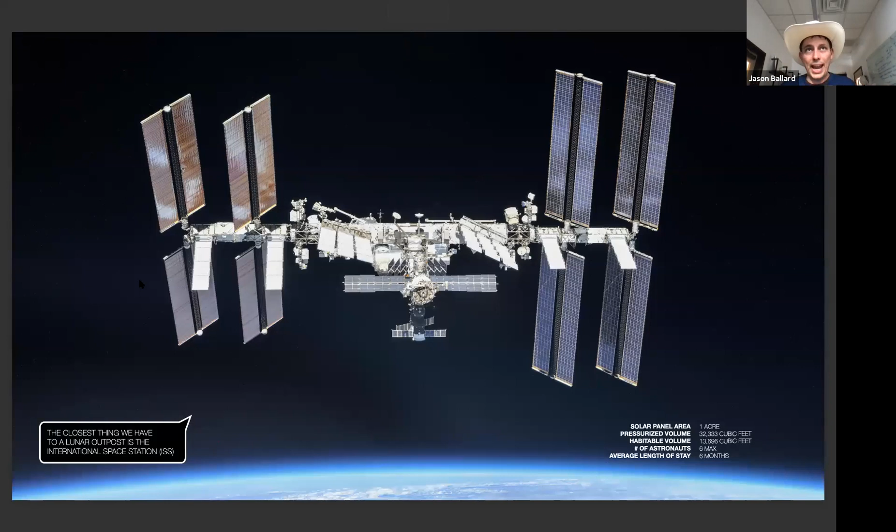We studied what people like and don't like about the International Space Station. We studied nuclear submarines, the Antarctic Space Base, trying to understand what makes spaces good or not good when you're living for a long time. The ISS, McMurdo Station in Antarctica, US nuclear submarines - how big are they, how are they laid out, what do they need, how do they support life? There was a ton we could learn, and we applied all that.

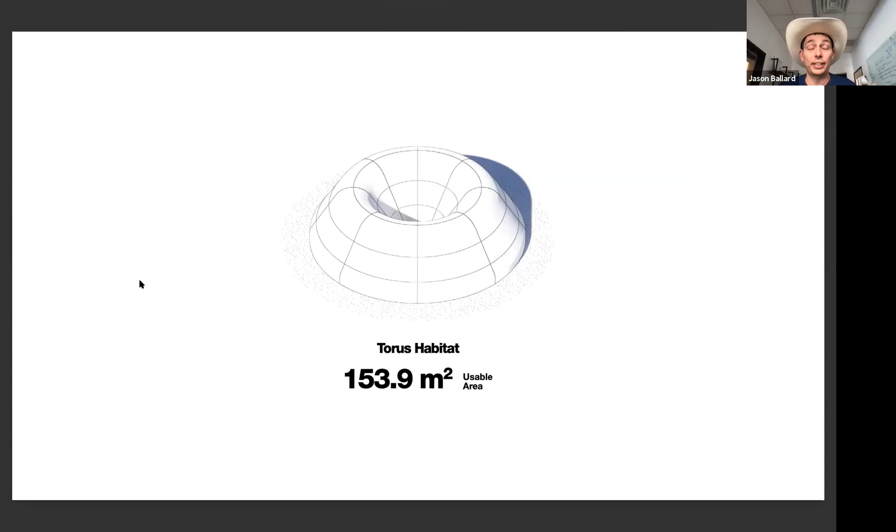Ultimately what we ended up at is that the optimal structure is this torus shape. At first we were experimenting with just printing it and piling regolith on top, which is what you see here. That seemed problematic in terms of lunar quakes and erosion - very long-term and slow, but with some erosive properties. We've thought about different approaches to actually constructing things.

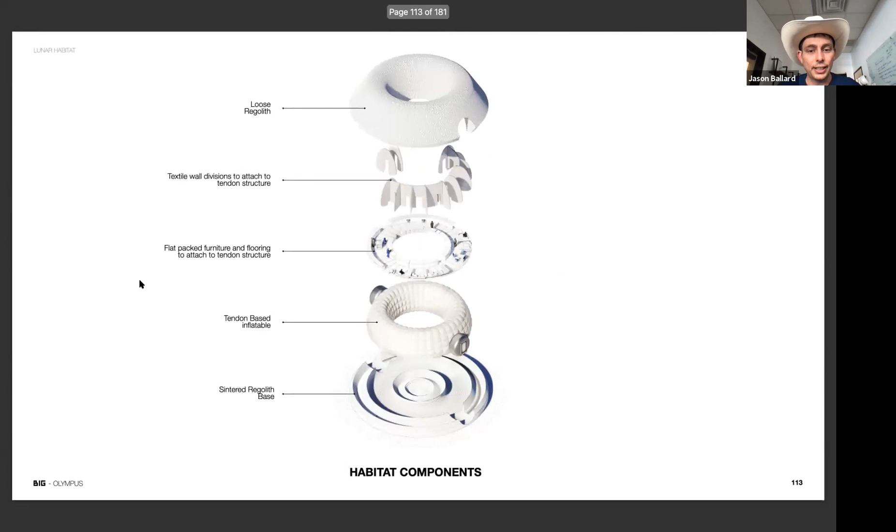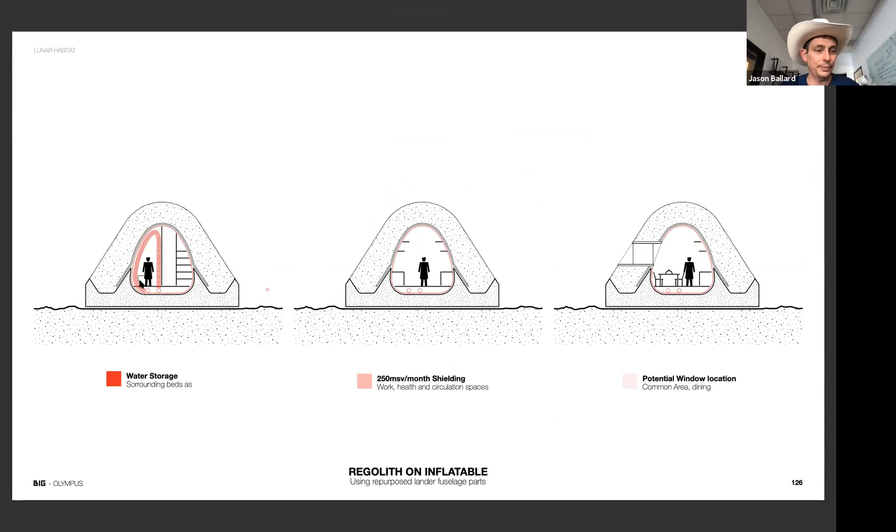Space planning - again, I'm going very fast, all of this we could talk about for a long time. This is radiation doses - you'd want to shield the sleeping areas more than the working areas, since you spend a ton of time in the sleeping areas. And where to store water - we've tried to think really hard about this.

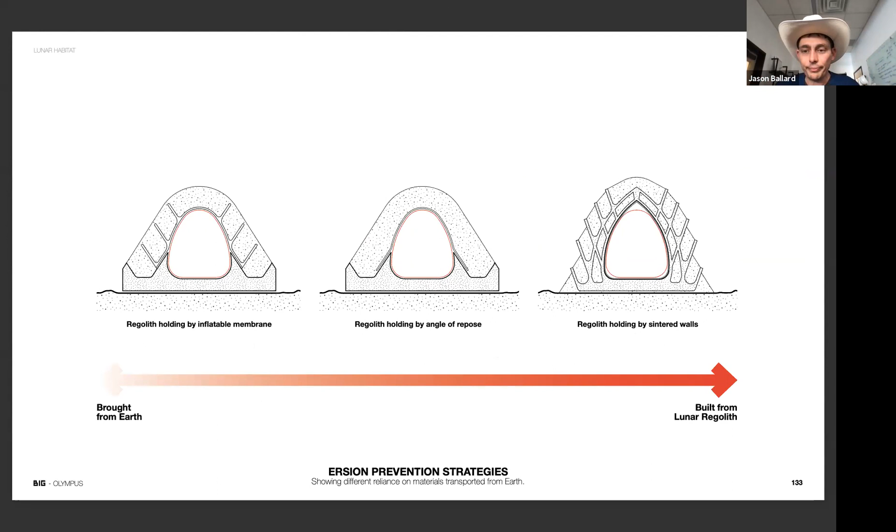Where we ended up heading, as you saw in some of the other things, is this idea over on the far right of printing formwork that is then filled with regolith. That formwork can add tensile strength as well as optimizing and retaining the regolith pockets for certain areas.

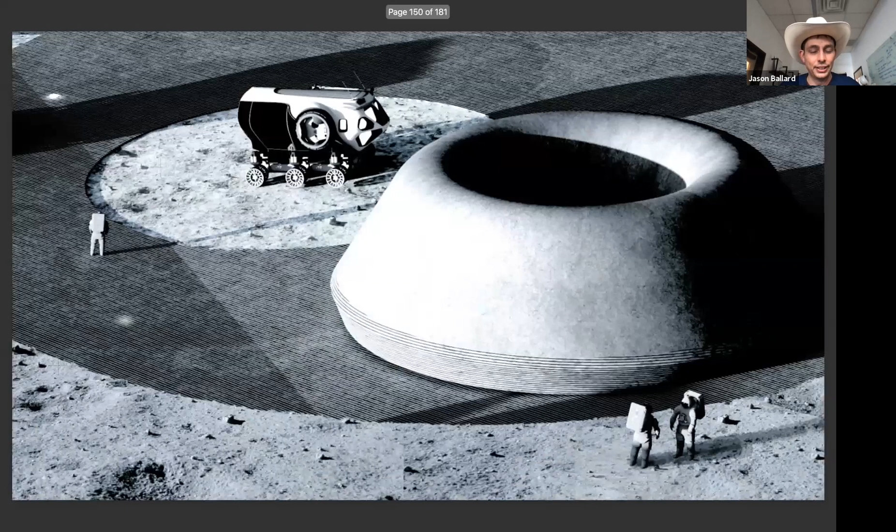You guys know about lunar days versus Earth days, how to light the space, how to make it so humans can actually live there. You're not going to want to bring your spacesuit in - you're going to need to crawl in and out of your spacesuit, so you don't ever bring dust. No dust should ever go inside the habitat, so you're going to want to crawl in and out the back.

That's sort of the architect - that's one of many architectural presentations. The reason we went through such a thorough architectural exercise is to make sure we were designing a system that could deliver what would actually be needed. We're actually not even the architects - we did all that just to make sure we're designing our system appropriately. I probably said this ten times already, but we can do this. We're really trying to be thorough and rigorous, and this is doable.